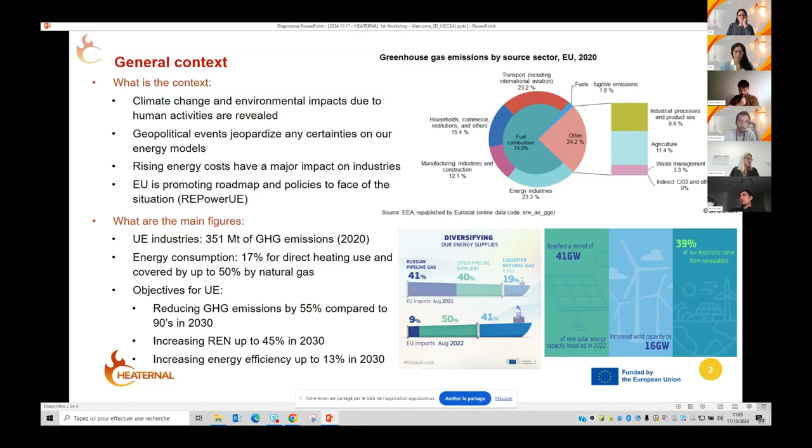Let me give you some data. Industry in Europe released 351 million tons of greenhouse gas during the year 2020, and the energy used for direct heating is mainly covered by natural gas, up to 50%. Consequently, the European Union has fixed some objectives to be achieved by the year 2030, such as reducing gas emissions by 55% compared to the 1990s, increasing renewable energy up to 45%, and increasing energy efficiency up to 13%.

So in this quite difficult context, HEATERNAL develops a thermal energy storage to meet industry needs of high temperature heat. Globally, this storage will be able to satisfy the need for decoupling heat generation from heat use in industrial processes, and this storage will be able to generate heat during off-peak times and so provide some flexibility in energy demand.

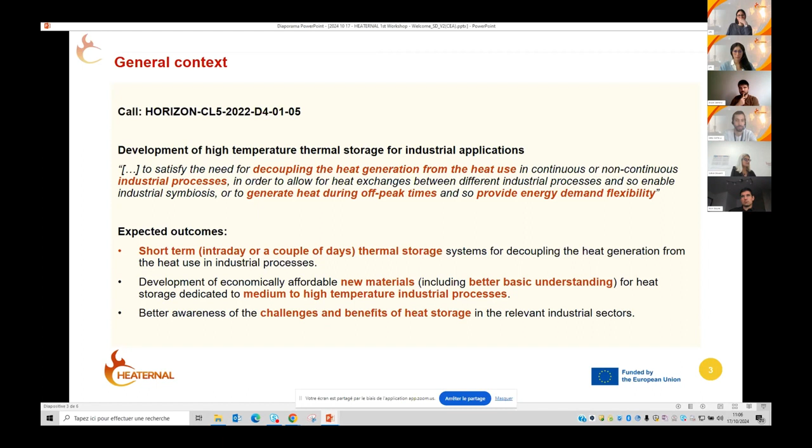Specifically, through HEATERNAL project, we expect to develop a short-term thermal storage up to 48 hours, to develop some new materials for heat storage dedicated to medium and high temperature processes. And we expect to enhance the awareness of the challenges and benefits of heat storage in industry.

After this brief introduction, we propose 4 presentations today. I will be pleased to begin with a general description of the project. Then the second presentation about phase change materials will be given by Ángel Serrano from CIC Energigune. The third one will be given by Sergei Bafalui from LEITAT, and will be about 3D models developed for HEATERNAL solution. And the fourth and last presentation will be by Wim Bain from Ghent University, devoted to thermomechanical modeling of the storage.

These 4 presentations will be followed by a questions and answers session during around 10 minutes. As coordinator of the project, I would like to thank the speakers, Ángel, Sergei, and Wim, for their contribution to this first workshop.

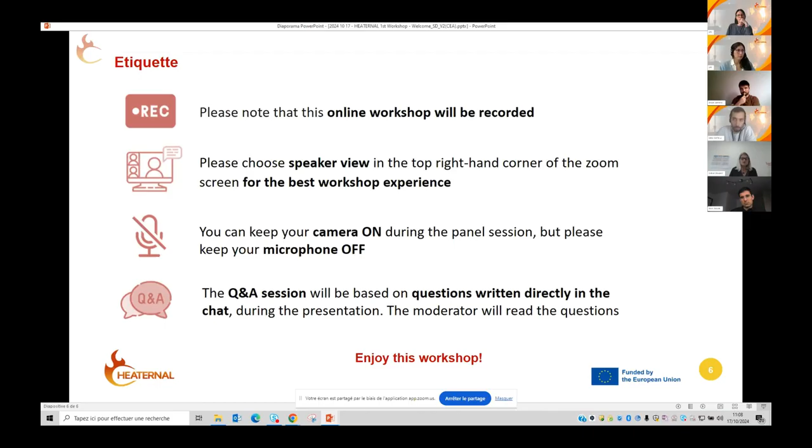Now I will begin with the general presentation of the project: the concept, the partners, the action, and of course its objectives.

As already mentioned, HEATERNAL project is funded by the European Commission, which is represented by CINEA agency. HEATERNAL project started in May 2023 and will last 3.5 years. The project aims at upgrading the HEATERNAL technology from level 2 to level 5, thus validating the concept through experimental tests in representative operational conditions.

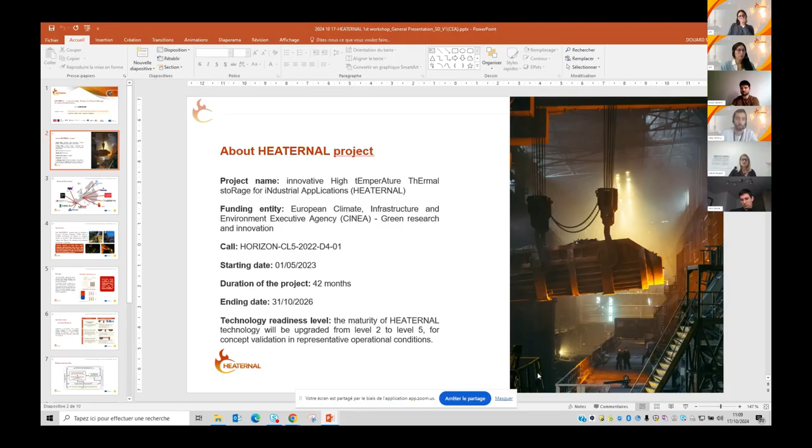The project brings together 11 partners based in Europe, mainly in Spain, Portugal, France, and Belgium. 4 partners are public research teams focused on prototyping, thermal modeling, phase change materials, and 3D printing. The project also involves 4 manufacturers, 2 from the metal industry and 2 from the ceramic sector, and also an equipment manufacturer, a society specialized in life cycle analysis and technical, economical analysis, and lastly, a society experienced in dissemination and communication.

We know that in many cases, industrial processes require continuous high temperature heat and release some millions of tons of carbon dioxide into the atmosphere. Unfortunately, no viable solution exists today for decarbonization of these processes.

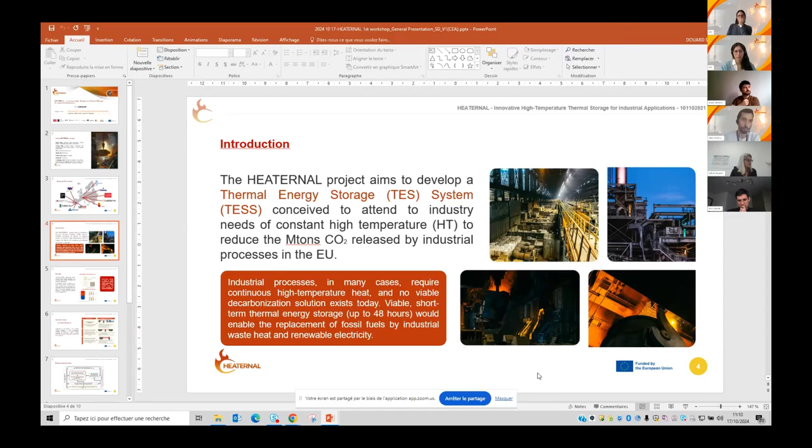Therefore, a short-term thermal energy storage will be an efficient solution since it would enable replacing fossil fuels by industrial waste heat or renewable electricity. So the aim of the HEATERNAL project is to develop an innovative thermal energy storage to meet the needs of industry using these high temperature processes.

The HEATERNAL concept is based on hybrid storage using ceramic and phase change materials, so-called PCM. This hybrid unit is represented on the top picture of this slide. The lower picture shows that the storage would be able to operate in 3 temperature zones, depending on the industrial application, and each PCM in each zone undergoes phase change at a different temperature. Thanks to this transition phase, each PCM enables an increase in the energy density of the whole thermal storage. So the PCM in the HEATERNAL concept will decrease the cost and also the carbon footprint of the industries.

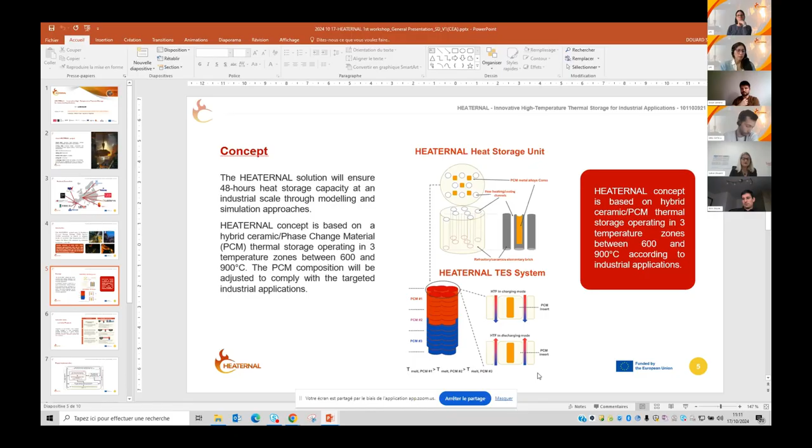Considering the integration of the HEATERNAL solution in industrial processes, 3 use cases are being evaluated. The first one concerns the aluminium industry, represented by Alcoa company. Renewable energy will be stored as high temperature heat during peak production of low-cost and intermittent renewable energy, then the stored energy will power a continuously operating electric calciner.

The second use case is the ceramic industry, represented by Torrecid company. For this case, industrial waste heat from a continuous process will be stored and reused in a batch process, such as a ceramic pigment furnace, and the stored heat will be used to preheat air between 600 and 750 degrees. The third use case is the steel industry, represented by Ugitech company.

For this case, industrial waste heat will be stored to heat a steel furnace during natural gas shortages or cutoffs, and this storage will also be used to maintain the furnace temperature during the weekend when the process is not running. So in all these cases, HEATERNAL storage will enable a reduction in the use of natural gas and thus reduce carbon dioxide emissions.

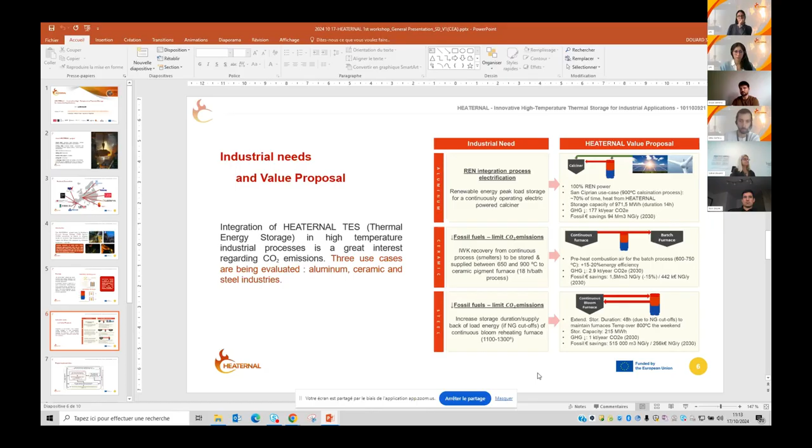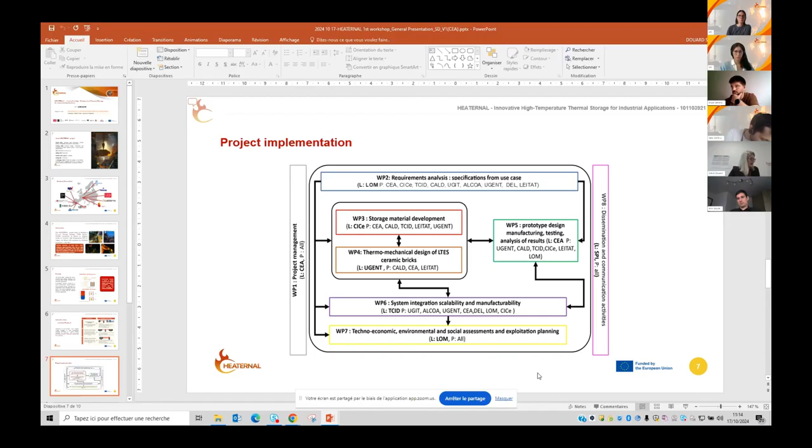In order to perform the project, the activities are divided into 8 work packages, 6 of which are technical. Briefly, work package 3 is devoted to materials development. Work package 4 focuses on thermomechanical design of the thermal energy system unit. Work package 5 aims at building and testing prototypes. Work package 6 will study the scalability and integration of HEATERNAL thermal storage in industry. And work package 7 will deal with technico-economic, environmental, and social issues, and also the exploitation plan.

Along the project, we have several short-term objectives: build and test a 50 kWh prototype in order to validate the HEATERNAL concept, maximize the thermal performances of the thermal energy storage unit, simulate the full integration of HEATERNAL storage into industrial processes in order to ensure rapid implementation and thus encourage stakeholders to invest in further developments, and lastly, ensure the economic viability and environmental sustainability of the thermal energy system.

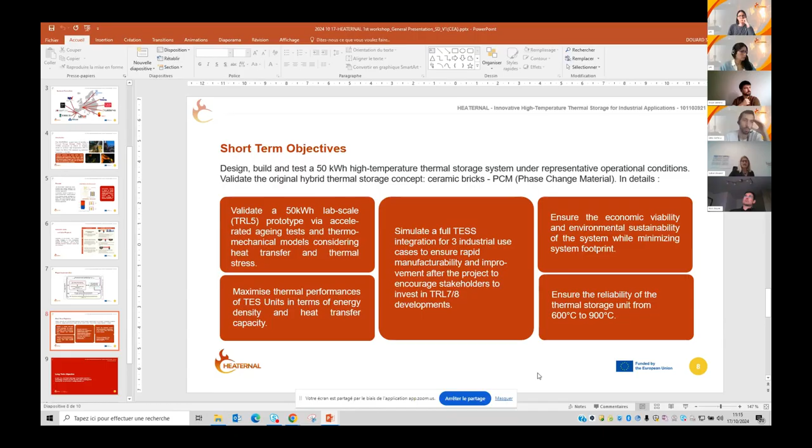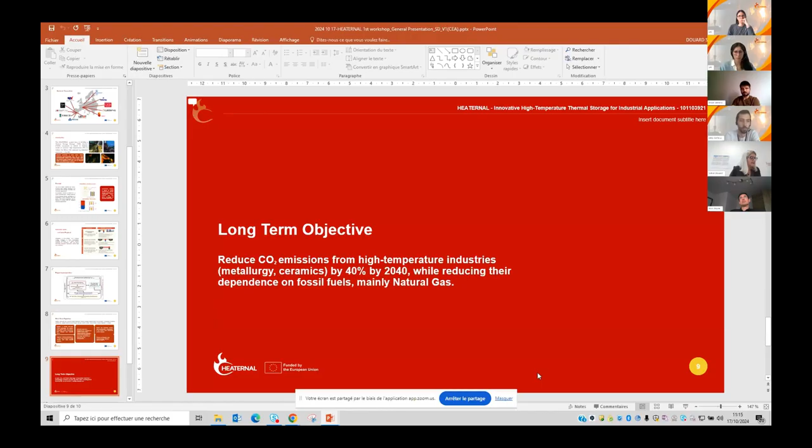As a matter of course, the long-term objective of this project is to reduce the carbon emissions from high-temperature industry by 40% by the year 2040, while reducing their dependence on fossil fuels, mainly natural gas.

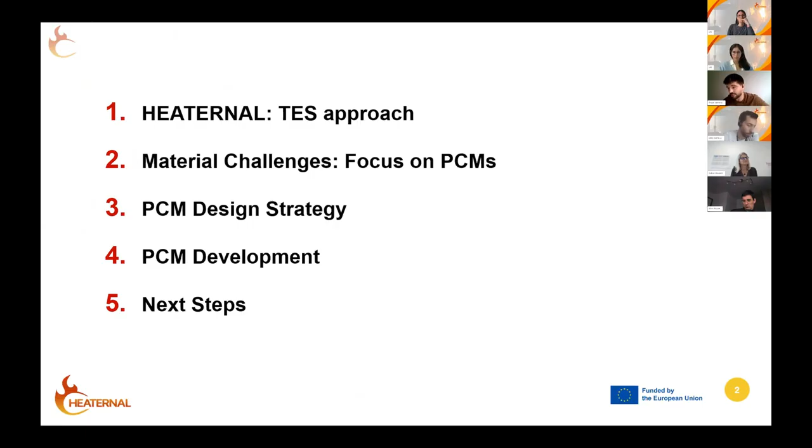To give you a clear picture, I will start by briefly explaining the overall approach taken in this thermal energy storage system. I will show you the key challenges we are addressing, the design strategy, and the current state of development, focusing on PCMs. Let's start by exploring the concept of the system.

There are 4 main objectives we are aiming for. Beyond the goal of a high thermal storage density, there are other equally important targets, including the sustainability and circularity of the system, as well as its long lifespan. With these objectives in mind, we propose a cascade thermal storage system.

The core of this solution is a refractory material containing one or more metallic PCMs. A PCM is a substance that changes from solid to liquid or vice versa at a specific temperature, storing or releasing energy as latent heat. This makes them very attractive for storing energy, especially in narrow temperature ranges.

When we need to store energy over a wider range of temperature, using different PCMs with different melting points at various levels helps us maximize the heat we can store by taking full advantage of the tank's temperature profile. This cascade system is not new.

They have been proposed before in the literature, mostly using molten salts. However, our innovative approach focuses on very high temperatures. So we are developing 3 levels of metal-based PCMs working at temperatures from 550 Celsius degrees to 700, between 700 to 800 degrees, and up to 900 degrees.

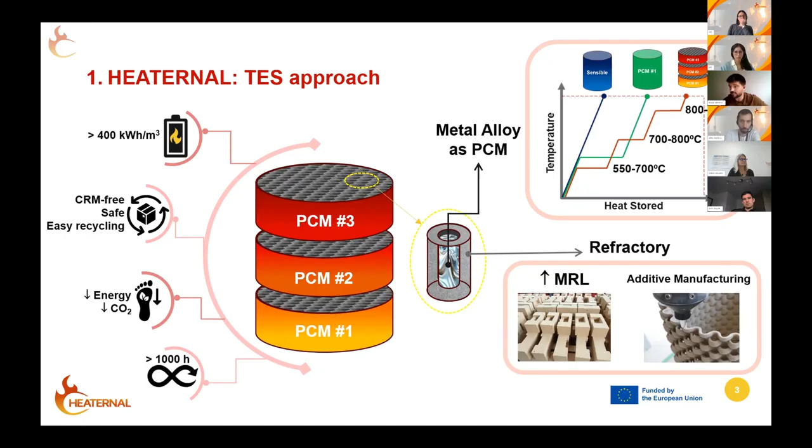And the second approach involves more complex geometries using additive manufacturing, which gives us more freedom to optimize the heat transfer and maximize the PCM content in the system.

And now that we understand the approach, what are the main challenges from the PCM perspective? First, we face challenges related to achieving the specific thermal properties that are required, such as melting point and energy density, all this while keeping a low cost.

We also have challenges in ensuring that the system can be recycled, as well as minimizing the energy consumption and carbon dioxide emission during its production. But I would like to particularly highlight the challenges related to the lifetime of the system.

First, the reliability of the PCM during thermal cycling. The PCM must maintain the initial thermal properties over many thermal cycles. It must also be compatible with the heat transfer fluids, which in this case is air.

This makes oxidation processes critical since we are working with metals. And finally, the PCM must also be compatible with the refractory materials, both chemically and in terms of thermal stresses derived from the different thermal expansions of both materials.

We are addressing all these challenges on several fronts, starting with the selection of raw materials and PCM design, incorporating also inputs from the life cycle analysis, and working in parallel on the formulation and design of the refractory materials. We also use thermomechanical simulations to help define the most suitable geometry that mitigates the mechanical stresses.

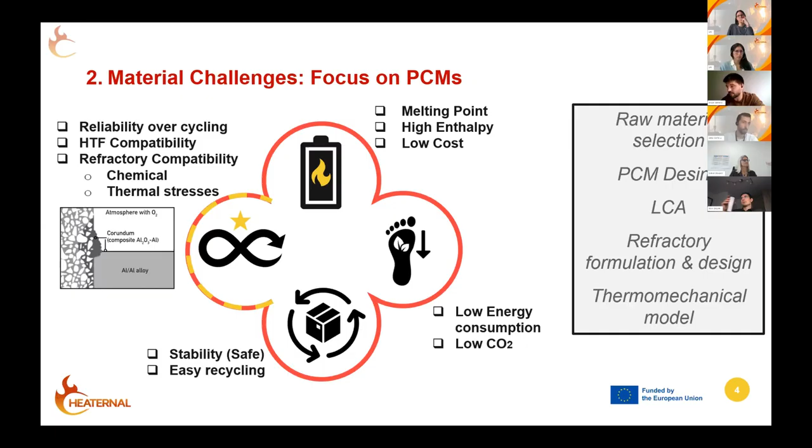Let me now give you a brief overview of the steps that we follow to design the PCM, in this case in close collaboration between CIC Energigune and CEA. The first step was to select the raw materials, the raw metals that could form potential alloy candidates.

For this, we apply criteria related to energy, stability, and cost, focusing on metals with low vapor pressure and excluding those with high cost in terms of euros per kilowatt hour. This allowed us to select some metals that we can use either as pure metals or in binary and ternary alloys.

With this range of metals identified, the first step was to review the literature for existing options. And while some meet our basic requirements, there are temperature ranges where suitable options are scarce or even unavailable. In these cases where we need a specific melting point, but there are no available reported options, we use the CALPHAD methodology.

The CALPHAD methodology allows us to calculate the phase diagrams of these alloys and thermodynamically predict which composition could be of interest. We focus on those with invariant transformation within the desired temperature range and with expected high transformation enthalpies. By combining both the literature research and CALPHAD methodology, we were able to identify a series of candidates that can cover the 3 targeted temperature ranges.

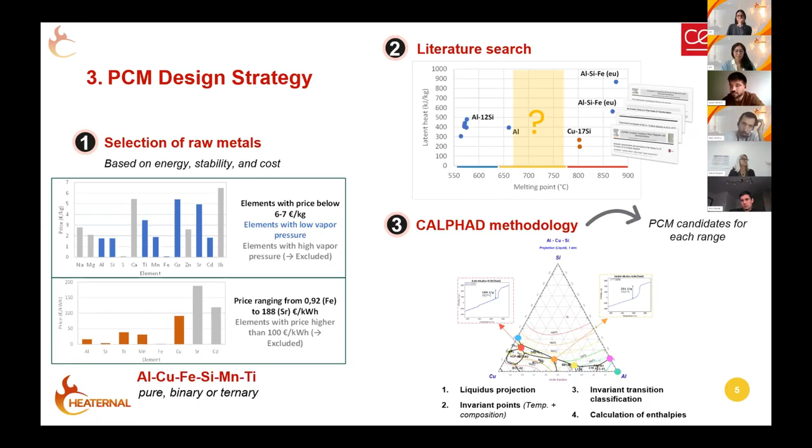Once we have the candidate formulations, the next step is to bring these materials to life and to test their potential. We start by optimizing the synthesis protocols for the alloy, focusing on processes that not only give us better properties in the final material, but are also more cost-effective and easily scalable.

All this process is followed by a deep characterization of the material. This characterization not only confirms whether we have achieved the expected alloy, but it also allows us to obtain the key thermophysical properties that fit the thermomechanical models.

The characterization includes microstructural and compositional analysis of the alloy, as well as measurement of the coefficient of thermal expansion, latent heat, specific heat, thermal conductivity, diffusivity, and more.

Once the ideal properties of this alloy are confirmed, we move on to a critical test, the thermal cycling around the phase change temperature of the PCM. And I say that this is a key test because it evaluates the evolution of the thermal properties over 100 thermal cycles in the presence of air.

From all this work, what we obtain is a portfolio of different PCMs with different advantages, like high energy density, low coefficient of thermal expansion, low cost, or even low density in terms of mass per volume, which allow us to design systems that are very light.

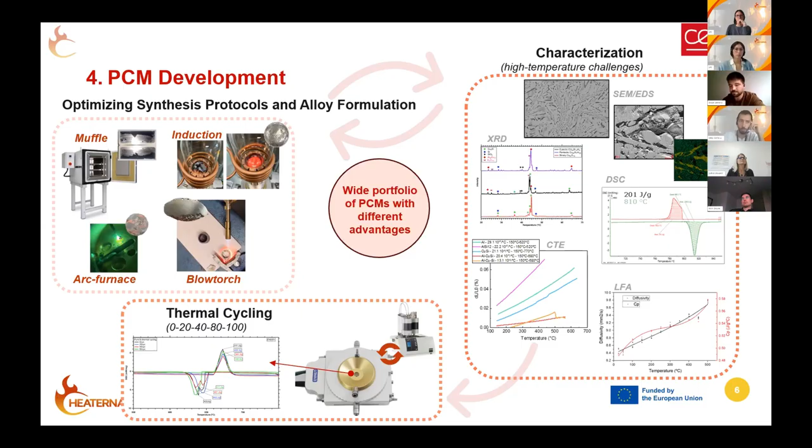To conclude, the next step will focus on ensuring the compatibility of these PCMs with the refractory materials, specifically aiming to identify any degradation mechanisms if any issue is detected. On the other hand, we will work on the integration of the PCM into the refractory, which, while it can be simple for more standard geometries, might present a challenge in the case of complex geometries produced via additive manufacturing.

And finally, the selection of the best PCM will be based not only on their thermal properties and stability, but also on the life cycle analysis and thermomechanical aspects that could compromise the mechanical stability of the system.

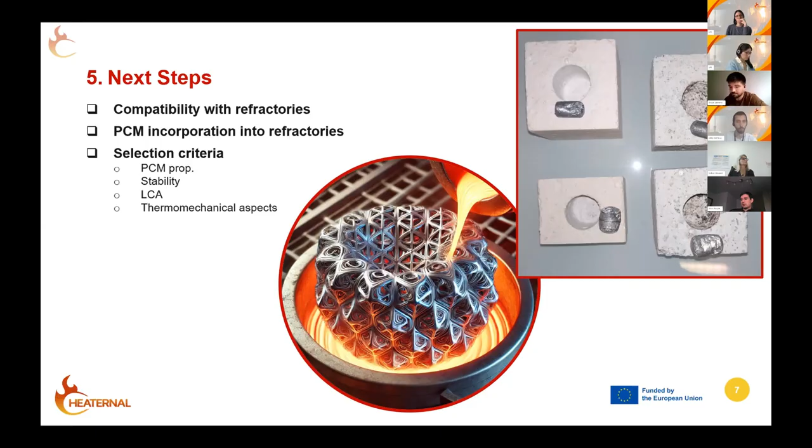Thank you all very much for your attention, and I will be willing to answer your questions at the end of the session.

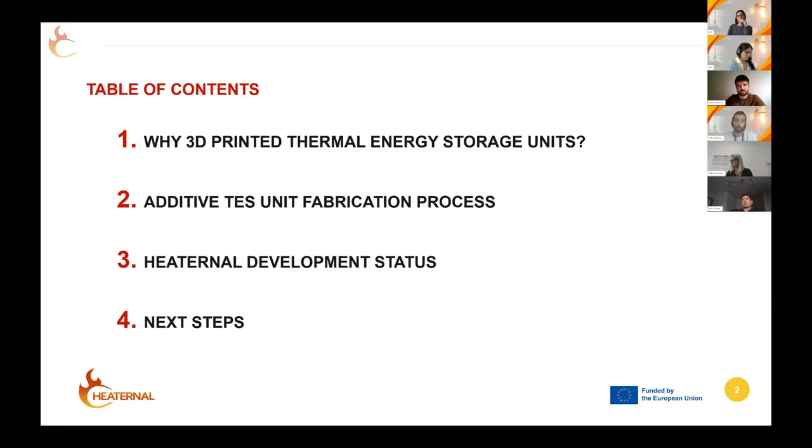So to begin, why additive manufacturing for the thermal energy storage units? There are several reasons for that. Compared to conventional manufacturing technology, it is quite disruptive in terms of, for example, design freedom.

It's widely known already that 3D printing can lead to geometries that are not easy to fabricate through any other conventional method. In the case of dealing with thermal energy storage, this can lead to a lot of advantages, amongst them the fact that you can print high surface area geometries, such as TPMS, which stands for triple periodic minimal surface.

As you can see in the images, these sort of geometries bring a significant increase in surface area of the material, and thus on the surface area by volume ratio. This means the thermal management is quite more efficient than expected, and a heat transfer coefficient improvement is expected by 30 to 80%.

In addition to this design freedom, there's also the capability to customize a part. As Sylvie was explaining earlier about the 3 different cases we are dealing with in industry, each case in each company will be different, and additive manufacturing allows for these differences to be addressed optimally by bringing customized solutions to each necessity.

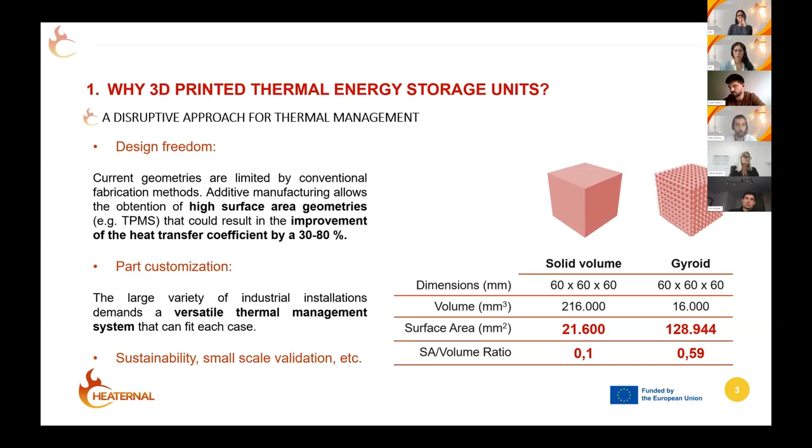So to continue, I will briefly describe the whole manufacturing process. It does not begin with 3D printing itself, but with the formulation of a mixture. This formulation occurs by basically... well, I should mention first that the technology we are using in HEATERNAL for 3D printing is fused filament fabrication.

This means we will need a filament. So to formulate a filament, we will need a polymeric matrix, we will need the ceramic compound that will basically conform the geometry of the printed part, and then we will need some additive to increase the plastic behavior, the flexibility of the material, and so on.

The first process is to perform the mixture of these components and extrude them into a continuous line. This extrusion then ends up with the pelletizing of this first filament, which is used to extrude it again in a filament extruder, so that the final diameter is calibrated to fit any 3D printing equipment, and spooled for being able to handle it.

Next, as shown in the picture, there's the fused filament fabrication process, in which the filament comes through a heated nozzle to deposit the material layer by layer.

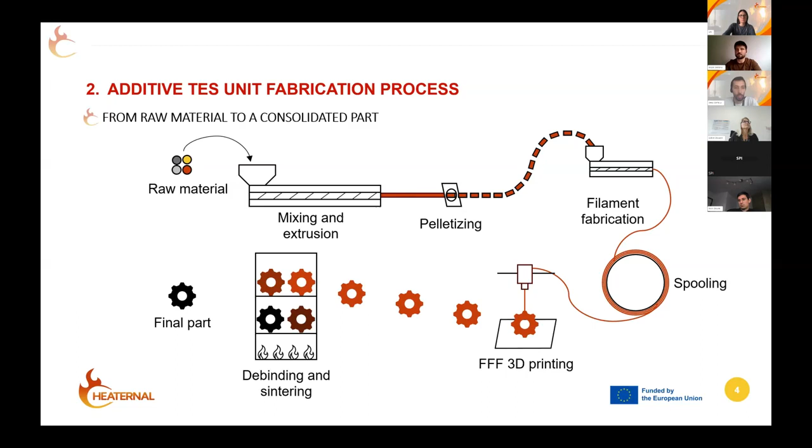So to continue, we'll begin with some of the developments we've been carrying out. First, there's the TPMS design selection. There are many TPMS design geometries, and in the case of HEATERNAL, we have decided on the geometry, and not only the geometry but also the percentage of each component within it, based on system requirements including the pressure drop and maximizing the heat transfer.

These two are generally a trade-off. If you try to reduce the pressure drop, the heat transfer will also be reduced, and so on. So there's a trade-off between these two factors, and also the system requirements based on the system dimensions themselves, the 3D printer, the dimensions needed for the industrial cases, and so on.

On the other hand, there's also the materials and process limitations, which include limitations regarding the 3D printing minimal printable size, the maximum dimensions of the 3D printer, and the mechanical stability required by the material for it to be processed into the sintering stage and mixed with the metal or the PCM afterwards.

In the current case, we have arrived at this solution, which involves 23% air volume, 27% refractory, and 50% PCM. You can see on the right images how those different phases are distributed in a 3D volume.

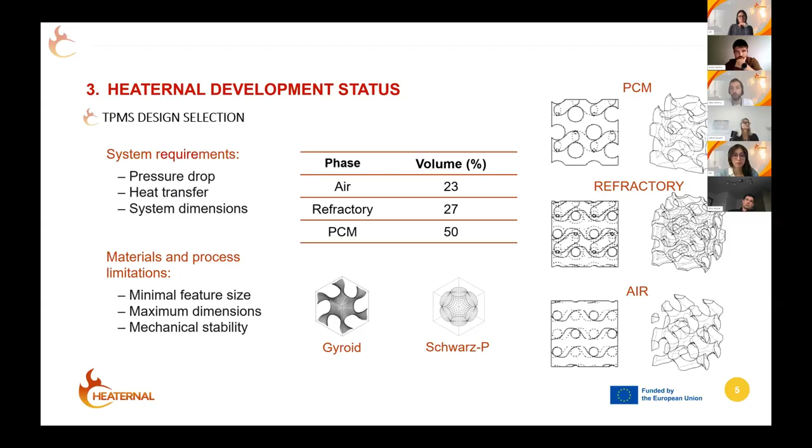On the other hand, regarding advances in the material formulation itself, it's quite challenging because of different aspects that need to be taken into account. Amongst them, there's the material flexibility needed for the spooling process after filament extrusion, and the material rheology has to be perfect for the filament to have an optimal extrusion.

Then the thermal properties need to fall into the suitable temperatures for fused filament fabrication. And finally, the ceramic percentage needs to be as high as possible in order to ensure maximum density is achieved after the sintering process.

However, this last consideration is a little bit contradictory with the first one, in which we look for material flexibility. So as we increase the ceramic percentage, the material flexibility will decrease.

This is tried to be overcome by the use of several additives in the formulation. As you can see, the material formulation takes into account all those previous steps I was just explaining, which makes it even more challenging.

We have already performed material flexibility studies to ensure the material can be pulled and no breakage occurs. We have also included debinding studies to take into account the very last stage of the process, ensuring it is considered since the beginning, so we don't find surprises in that regard at the end of the project.

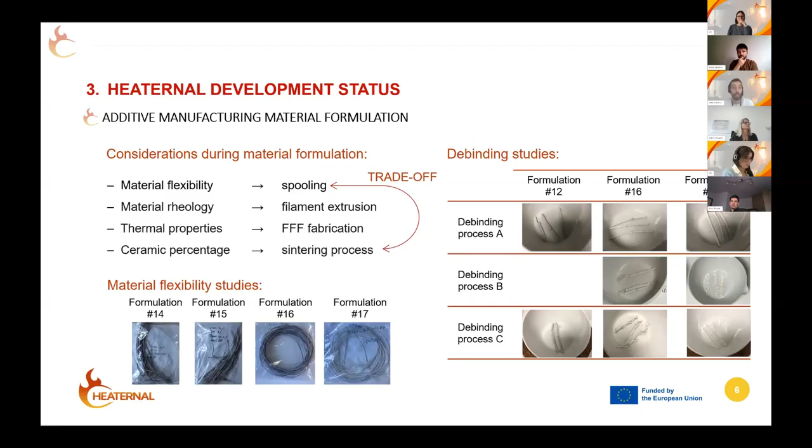Finally, to continue, we have already started with filament fabrication itself. We have found a formulation with around 60% ceramic content, which is quite interesting already.

We have managed to extrude a filament. I'm sharing this video as well, in which you will see the filament being spooled, showing the high flexibility we have been able to obtain.

Yeah, and it may look simple, but as you saw on the last slide, we have tested up to almost 20 formulations with different polymer percentages, different ceramic percentages, and a variety of additives.

Also, we have already used a lower ceramic percentage formulation to print a first demonstrator, as you see in the last picture of the slide.

Here at the bottom, you can see the stability of the filament diameter as it is formed, which is indicative. Generally, a filament for 3D printing should be 1.75 millimeters thick or 2.85. In this case, we are dealing with 1.75 millimeters, and you can see that the diameter is stable enough for it to be processed.

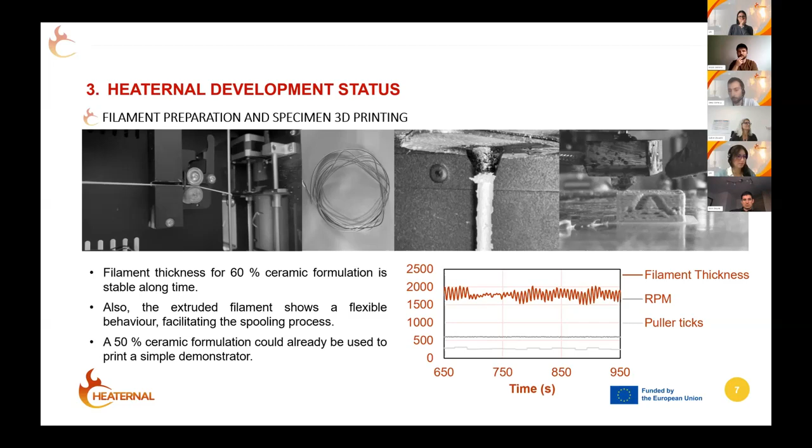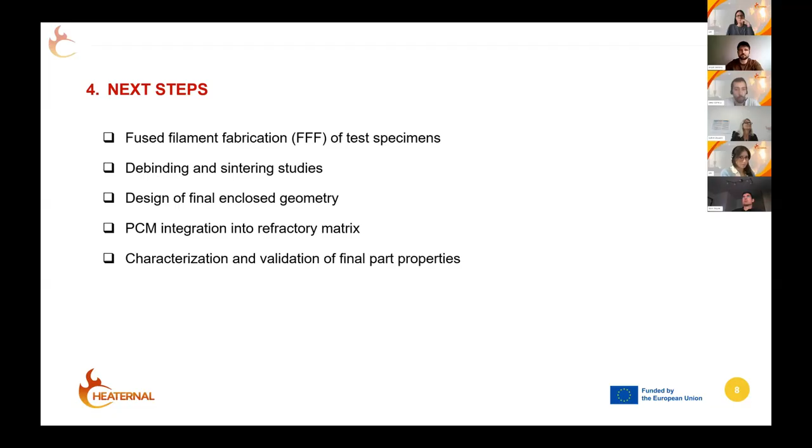Okay, I think that's all, and thank you for your attention. We'll be looking forward to your questions at the end of the talk.

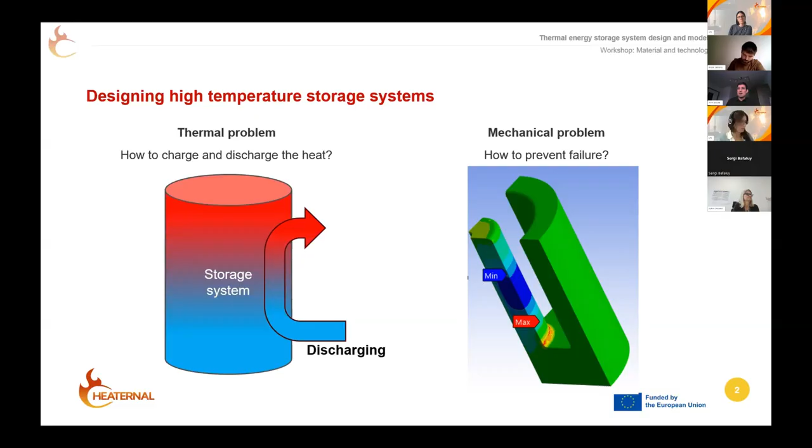That's the thermal problem. The second problem is the mechanical one. You have a system which goes through thermal cycles with rather large temperature differences, because we're doing storage at high temperatures, which usually also means high temperature differences. That means a lot of thermal tensions, and there's also a difference in thermal expansion between PCM and refractory. So you really need to pay attention to mechanical issues so the system doesn't fail.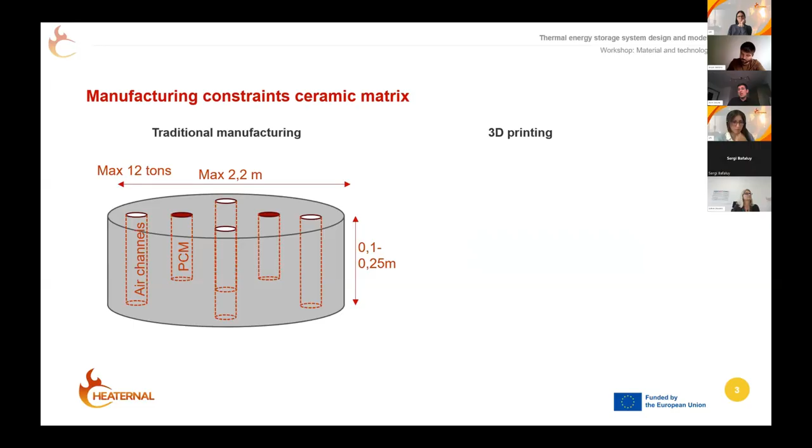On the other hand, we have 3D printing. The previous presentation discussed this 3D printing strategy. The outer dimensions you see here are what we can maximally print in the systems we have now, but this is of course still in development. I will show you that it's, from a system design point of view, quite a promising technology.

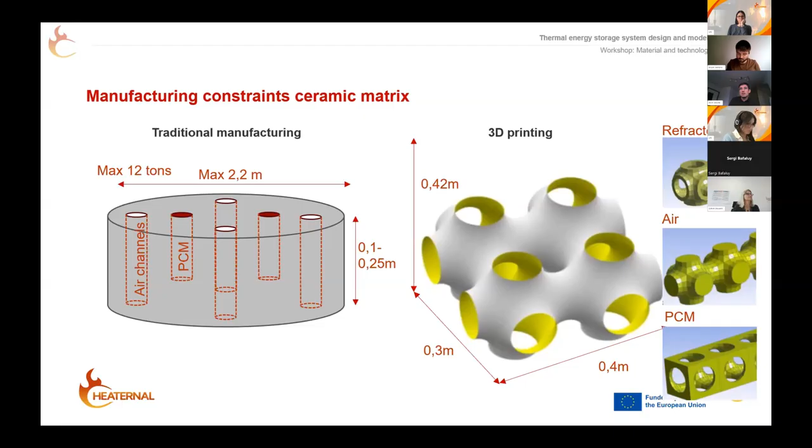Okay, now let's go to traditional manufacturing. The first question you can ask is how can we geometrically define these things? We've defined several possibilities, shown here on top. The gray is the ceramics, the refractory; the red is the PCM; and the blue is the air holes. You have different types of geometry you can build with this system, and you want to know what's the optimal unit to start building. To know that, we take the three variables on the right-hand side.

The bottom two of those are something everyone who does heat exchanger design knows: heat transfer rate and pressure drop. You want a high heat transfer rate and a low pressure drop, but usually if you increase heat transfer rate, you also increase pressure drop. So there's a trade-off between those two. Important in this case is that the dominant thermal resistance will be your air, compared to the thermal resistance of your ceramics and your PCM.

Besides these two classic variables, you also have stored energy. So how much energy can you store? What's the thermal mass of your system? That's where our PCMs come into play, where you have the latent heat, which you want to be as high as possible. Secondly, our geometry will define how much volume percentage PCM you can have compared to the refractory and air.

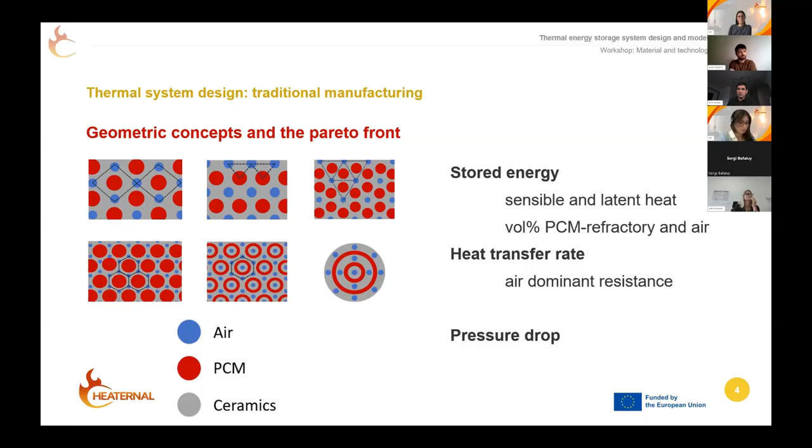If you compare those three variables for one of these systems, you get these Pareto fronts, the optimal points where, for example, your stored energy is maxed, you can't increase your stored energy anymore without increasing pressure drop or decreasing heat transfer rate. All of these points form a front. If you compare all the fronts for these different geometries, you find that the ring design actually obtains, in the regions we're investigating, the best performance. So we went for those rings.

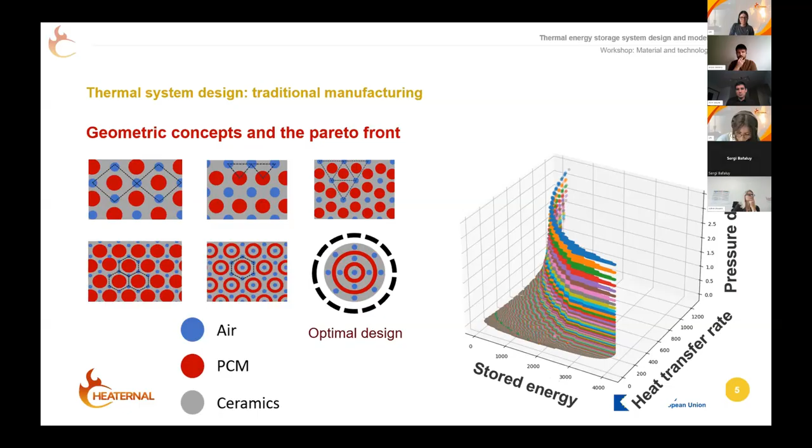Now, this is a very crude analysis based on correlations for the heat transfer rate, for example. We go into further detail - sorry, I was a bit ahead. We can first compare this Pareto fronting with the 3D printing.

So we have traditional, now the 3D printing. What we see is that in terms of stored energy, the 3D printing is better. In terms of heat transfer, it's also a lot better. In terms of pressure drop, that's of course a trade-off - your pressure drop is higher.

The main thing we still have here is that we're not sure of all the manufacturing constraints, so the minimal wall thickness. At this point, we have to wait for those to further the thermal design. But based on what we find at this point, it's very promising, a very promising technology.

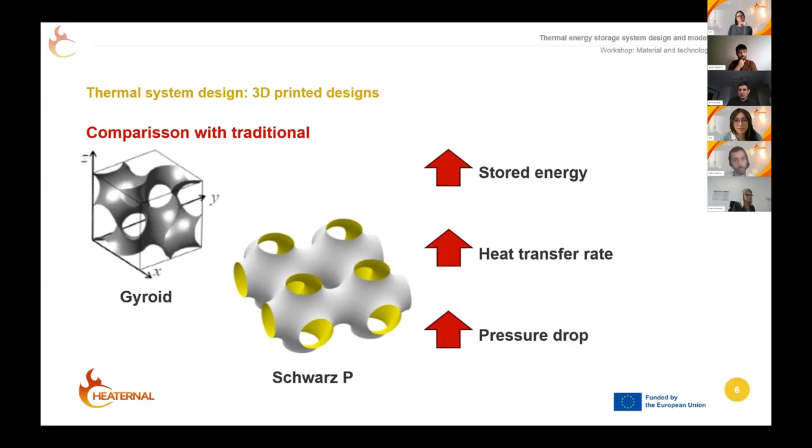Now, if we go to our traditional manufacturing, you need to make a thermal design model. And then you need to put inputs and outputs to the system. How does this look like? This looks like this: you have a temperature on one axis, the y-axis, and time on the bottom.

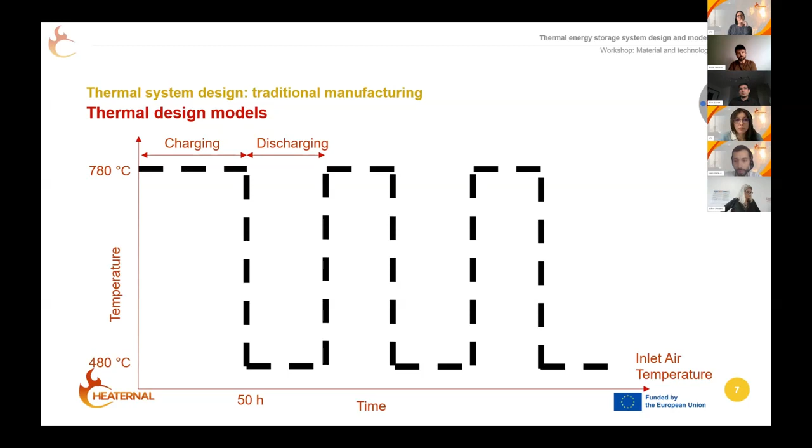And you apply a cycle of charging and discharging where you have an air inlet, and we've defined it constant now for a certain amount of time. You apply this to a thermal model, and from that thermal model, you get the temperatures of the outgoing air, but also temperature inside your systems of PCMs and refractory. You want as much energy stored as possible, and thus as high as possible temperature difference between your in and your outgoing air.

How do these thermal models look like? We have different levels of complexity, because the more complex you make your model, the longer the calculation time will be.

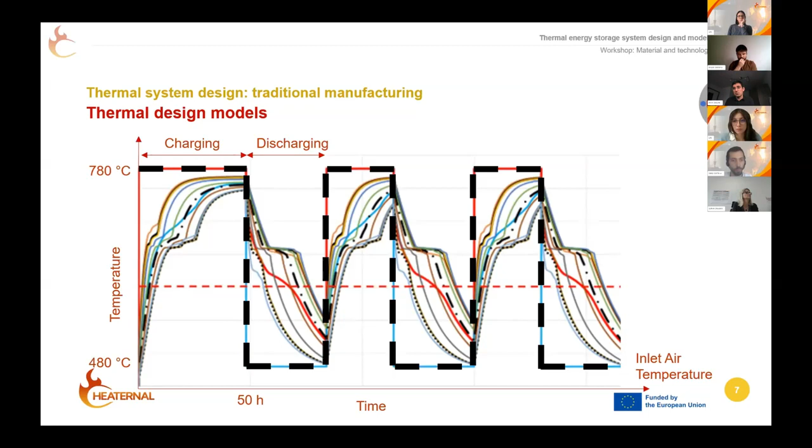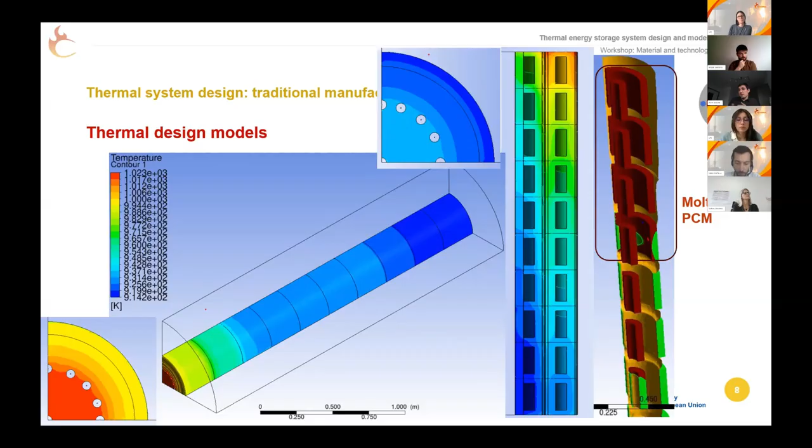We make geometric adaptations and check with these models to obtain an optimal solution for a specific problem. This was our thermal problem, so I've shown you how we try to solve these things. The second thing is our mechanical problem, and it's thermomechanical, so you get thermal fields and thus stresses.

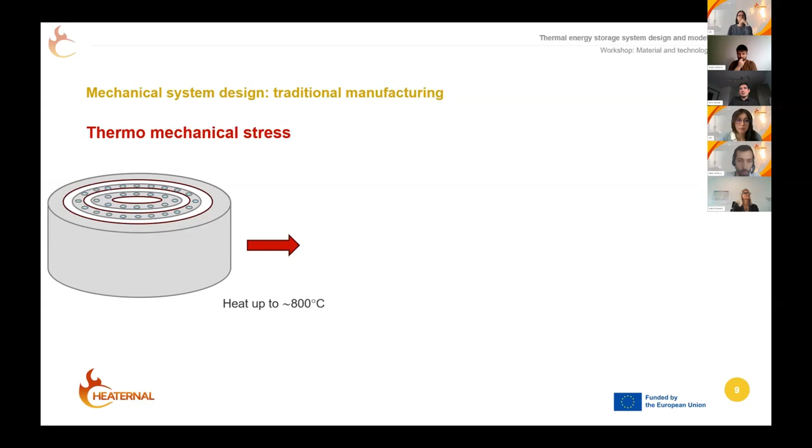Now, what actually happens is you have a refractory brick, you heat it up to about 800 degrees Celsius, and you add to it PCM pellets, which will melt. At 800 degrees Celsius, it is in somewhat of a stressless state, it's annealed, and the PCM is liquid. But then the system cools down, and it should be able to cool down to 25 degrees, and you get stresses due to differences in temperature field, but also differences in thermal expansion.

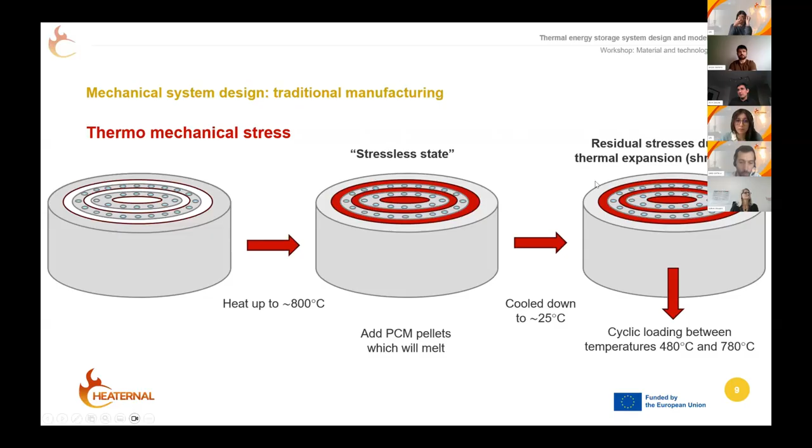Besides that cooling down phase, you also get a cyclic loading phase, here between 480 and 780 degrees C. So we want to investigate those things. How do we do this? We do a static structural analysis.

We take our temperature fields from the thermal model and implement them in a mechanical one. We use linear elastic material modeling, basically because of the simplicity, and it is a conservative approach to material strength, and we want to be conservative in this regard. We apply a minimal maximal principal stress criterion to check if our design is good.

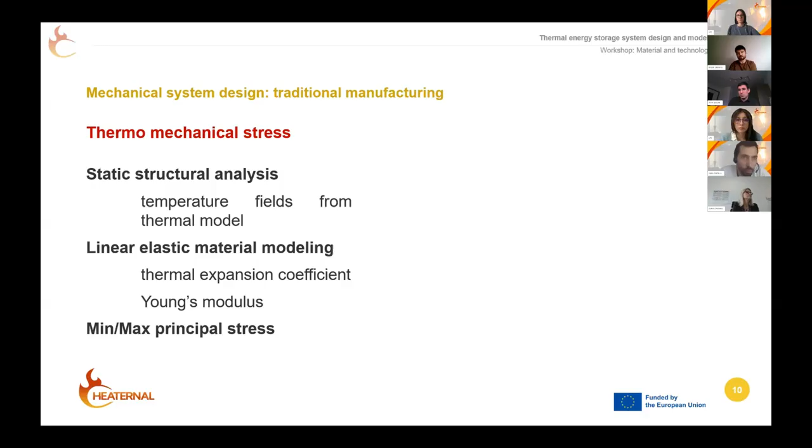With the original design with the rings we had, we noticed that both compressive stresses and the max principal stress, min principal stress, we have two problem zones. You see here an enlarged deformation of a part of a brick. Around the air holes, we have too high compressive strength. In the corner, we have too high tensile strength.

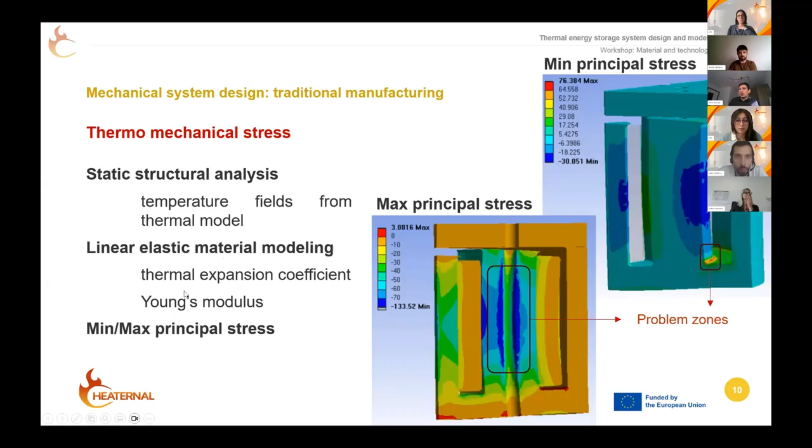Based on that model, we can propose an improvement. We separate the PCM rings, and if we do that, we see a decrease in the stresses below our safety level. So we're moving forward with that design. We have an interaction between thermal modeling and mechanical modeling, of course.

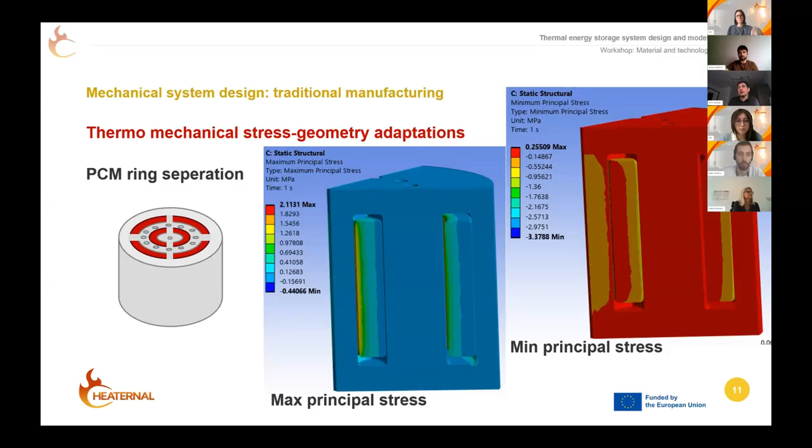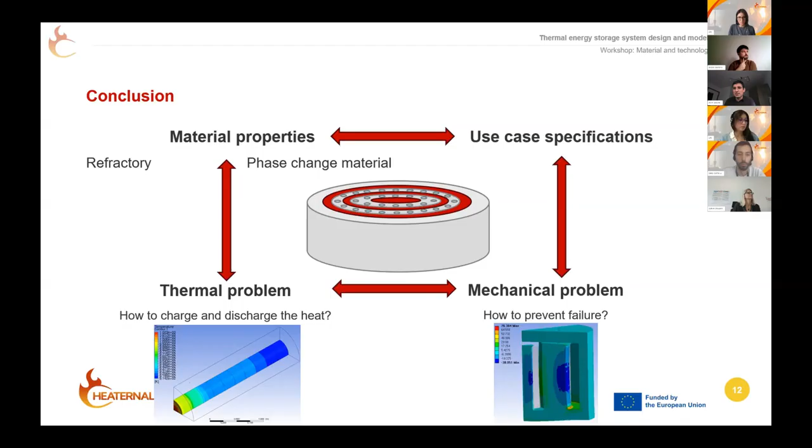To conclude, there are four major aspects here. One, the material properties of your refractory and phase change materials. You have the use case specification, so your inlet and outlet specifications for charging and discharging. Then you have thermal modeling, where you want to optimize heat transfer rate, pressure drop, and stored energy. But for the mechanical problem, you don't want it to break. All of these things interact, and you should integrate them in an iterative approach for proper design.